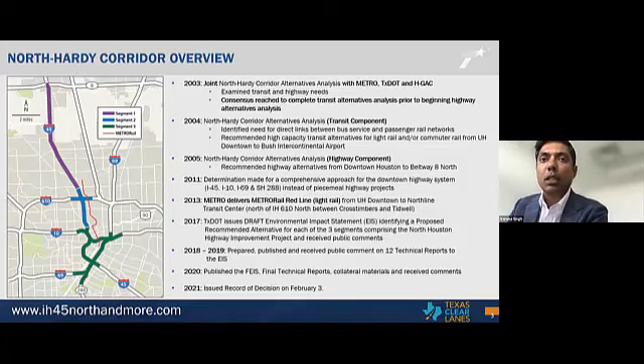So we published the draft environmental impact statement in 2017, conducted the public hearing and received comments. And then in 2018 and 19, we published the 12 technical reports that go with the EIS for public comments. And then in 2020, we published the final EIS with the accompanying final technical reports for public comment. And then earlier this year, we were able to issue the record of decision to conclude the environmental clearance process in early February.

So why is TXDOT proposing the North Houston Highway Improvement Project, or NHHIP?

We know that the corridor has high levels of existing congestion. Many of you may know that Texas A&M Transportation Institute publishes annually the top 100 most congested roadway segments across the state, and this particular corridor project has 5 in the top 10 across the state. So clearly it is congested.

We know the region also will grow by some estimates from a current 6 million to around 10 million by 2040, with anticipated projected traffic growth. There are certain elements that are outdated in their design in terms of curvature, of direct connector ramps, and low bridge clearances. Long stretches of the corridor also lack inside and outside shoulders, and it's an older corridor. We haven't done a major investment, capital improvement in over 30 years.

So the purpose of the project would be to apply current design standards to enhance safety, mitigate congestion by improving mobility and operational efficiency. A big part of the project would be to expand transit and carpool capacity with a 2-way 24/7 operation, specifically along I-45 in segments 1 and 2 as they terminate into downtown.

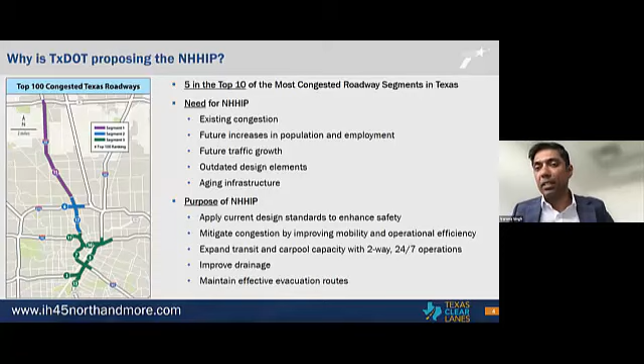And certainly maintain 45 as an effective evacuation route. I want to touch briefly on project development in terms of funding.

So you can see the segments there, and it's kind of reverse order of what's funded and our plan of attack of project delivery. If we had thought about it when we numbered the segments back in the day, in terms of when we would secure funding and come up with a game plan, perhaps we would have numbered it differently. So we're going to go in reverse order. We're looking to deliver segment 3 first, then move north to segment 2, and then finish out with segment 1.

And you can see, combining segments 2 and 3, we've got over 76% of the construction dollars secured, so $5 billion of funding committed. And then segment 1 is currently unfunded, representing about 24% of roughly $6.7 billion construction costs. So we're well on our way to securing the funding to deliver the corridor, which is kind of a pleasant situation to be in, to be frank, on a major initiative like this, to get the funding secured in this manner relative to the conclusion of the environmental clearance process.

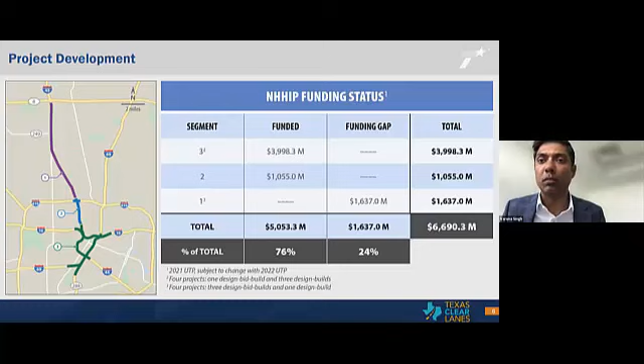Obviously, as much as we'd like to expedite construction, the bandwidth of the construction industry to absorb $6.7 billion in construction all at once is limited. So our plan to deliver the corridor is shown there with 4 distinct projects in segment 3, a single project in segment 2, and perhaps 4 projects in segment 1, as shown on the map and the table. But perhaps we can combine large portions of project 1A with segment 2 from a constructability standpoint. So that's still being evaluated.

We're going to use both delivery methods available to us: our traditional design bid build, or low bid letting, as well as design build alternative delivery, which is under Grady's umbrella. The first project is along 69, 3A. That's hard bid, design bid build traditional. And right next to it is the first design build, 3B.

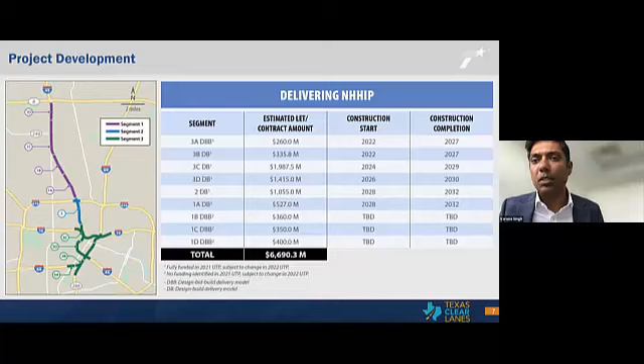So we're looking to push those out to construction in fiscal year 2022, and you can see the completion years. The idea would be then every 2 years after that, we push out the next component. So 3C would follow 2 years later with the design build procurement, and then 3D after that. And as funding comes online, we'll look to schedule portions of segment 1.

If you follow transportation news in particular, 45 or NHHIP has been a high profile project. There is certainly a vocal group of critics of the project, and in listening to those throughout the environmental clearance process and engaging stakeholders, we've come up with a number of mitigations that are part of the approved environmental clearance documents, the final environmental impact statement, as well as the record of decision, or ROD. I want to go over at a high level some of the significant mitigation we are proposing for the project.

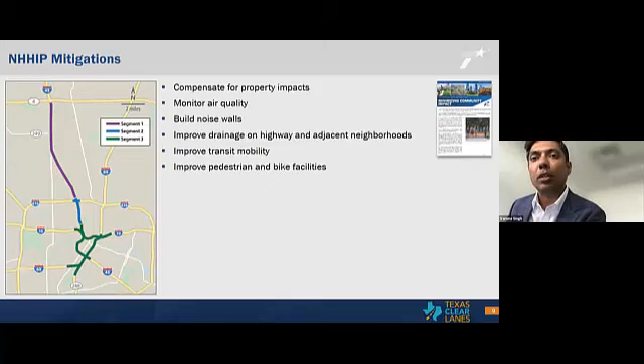Regarding the property impacts we are having, we have latitude to make a fair market value offer on the property, but we've committed to go above and beyond fair market value to assess it as if the impacted homeowner would like to remain in the neighborhood. Instead of diluting the comparables by looking at a wider geographic area, the comparables are intentionally selected from the neighborhood where the impacted homeowner or tenant currently resides. That will, by its nature, drive a higher value of compensation so the homeowner or renter, if they so choose, can remain in their current neighborhood. Federal law doesn't require them to choose that, but while we can compensate them for that higher amount to remain local, it's ultimately their choice.

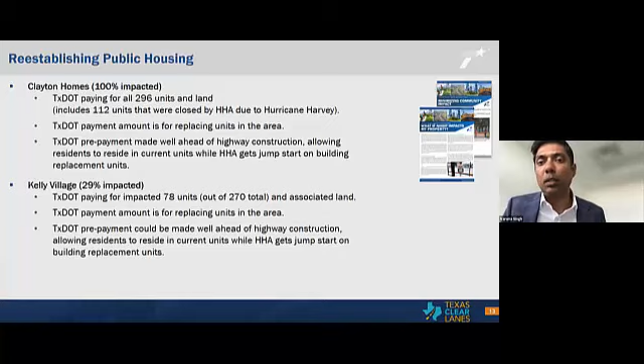Kelly Village, it's a 29% impact that the project is having, and we are committed to structuring the acquisition in the same manner, where we're depositing the dollars well ahead of construction, so HHA has the financial resources to rebuild the units before we need the property for construction. Those negotiations are ongoing.

Air quality. This is on major highway projects, obviously in metropolitan areas, a concern. The data here shows that by and large, air quality is improving in the Houston region. This is shown with metrics that for a region in non-attainment, the metrics monitored by EPA and TCEQ are actually improving compared to increase in population and daily vehicle miles traveled.

So you can see as the population has increased in Houston from 2000 to 2017, and miles traveled have also increased, you can see the CO, NO2, fine particulate matter, and ozone have actually gone in the opposite direction, in a good way. So with that, TXDOT is still committed to providing dust suppression during construction.

We are committed to funding and deploying ambient air monitoring for a minimum of 5 years during construction for the segments. The results of the monitoring would be on a publicly accessible website. The first monitoring, I believe, is next to an elementary school adjacent to the corridor, to show that the project itself is not impacting air quality at that site.

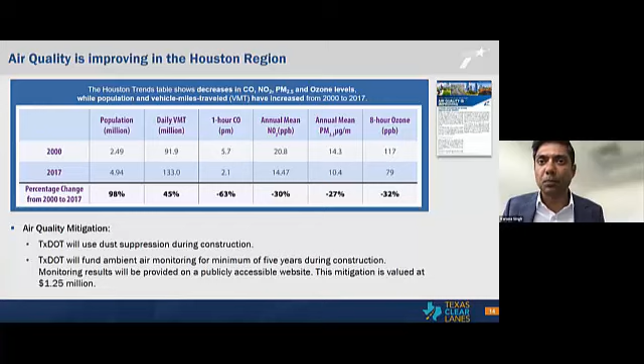Noise impacts. I'll say the corridor is so old that we didn't have the noise mitigation requirements in place when the original corridor was constructed. So right off the bat, with the implementation of this project, those requirements would get implemented.

So certainly the noise analysis shows that certain noise walls were warranted in certain locations. But in addition to the warranted noise walls, TXDOT is providing adjacent property owners in environmental justice areas, which are high minority, low income areas, the opportunity to receive noise mitigation that did not otherwise qualify under the noise analysis criteria. And so we're calling these aesthetic walls.

I don't miss an opportunity to remind our folks we probably should have come up with a better name, because aesthetic walls give the impression that it's going to be better looking than the noise walls. They're essentially noise walls, and the same treatments will be offered for input from the adjacent property owner as noise walls, to offset adverse impacts in high minority and low income areas. They also provide a visual screen.

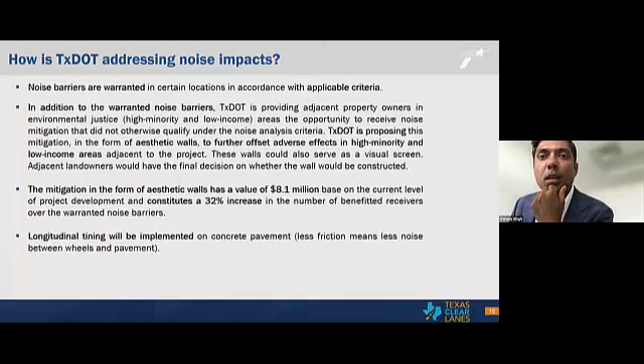Flooding, we will be applying the new Atlas 14 rainfall criteria. The main lanes and managed lanes will be designed to remain passable in the 500-year storm events. Pump stations will pump stormwater into detention basins, and detention basins will be sized to hold stormwater until it can be safely released into the receiving bayous.

You can see the map there, the reality of where the project sits intersecting and paralleling the major bayous in the region. Working from south to north, you've got Brays down below, Buffalo Bayou, and White Oak, and then we cross Greens up north in segment 1.

In addition to the highway-specific improvements for drainage, after Hurricane Harvey, the city of Houston and flood control applied for FEMA grants for 2 bypass canals in the Central Business District along Buffalo Bayou, where the cursor is. And so TXDOT is actually an engineering and financial partner with the city and Harris County Flood Control, because as we all know, a drop of water really doesn't care about jurisdiction.

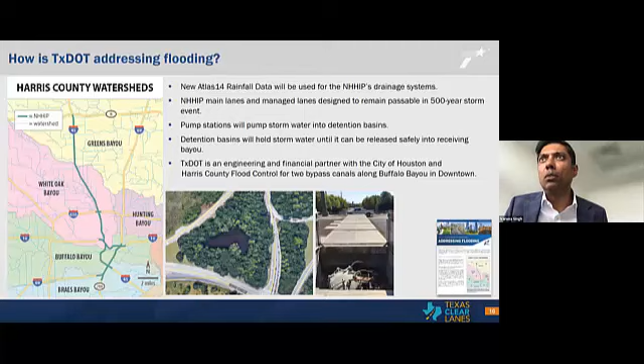It's going to flow where it's easiest to flow. And so we recognize the value of leveraging the improvements by other entities beyond the state's right-of-way and our core responsibility for drainage with the highway. That's why we're contributing financially to their FEMA application for those 2 bypass canals, because there's an overall regional benefit to get those canals constructed.

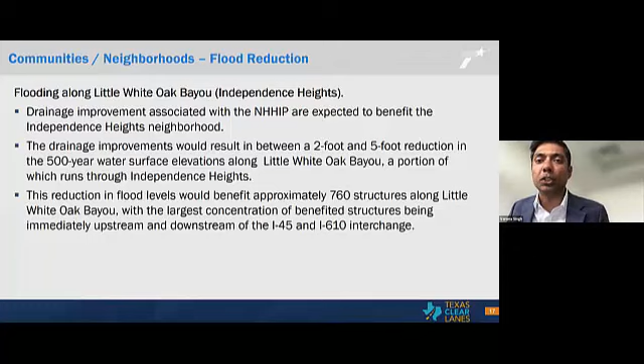Specifically, Little White Oak Bayou, which is the northern part of segment 2 and the southern part of segment 1, is in the 610 area, near 610 and I-45, where the purple segment meets the blue segment. The project area includes Independence Heights on the west side of 45. Large portions are in the floodplain today, and these improvements, combined with TXDOT and the canals mentioned earlier, would bring dramatic improvements to this area with a 2 to 5 foot reduction in the 500-year floodplain water surface elevation along Little White Oak, resulting in approximately 760 structures being pulled out of the floodplain, in the 45-610 interchange northwest quadrant.

A lot of critics of the project want more transit. What we offer is that the project itself, before its conception, did take transit into consideration when we jointly studied the corridor with Metro and the MPO, starting back all the way to 2003.

The project is the highway component. We're talking about Interstate 45, mainly a designated hurricane evacuation route. So TXDOT has a certain responsibility to keep 45 viable as an interstate facility for drivers and freight. The Port of Houston is one of the largest ports in the nation, so truck freight movement is critical to the regional economy as well as the statewide and national economy.

But we did consider and incorporate transit every step along the way. As mentioned earlier, Metro delivered the transit component with the red line extension shown on the map in red. The vast majority of the added capacity of the highway component is in the form of non-toll managed lanes, which greatly expand Metro's bus service and carpool vehicles.

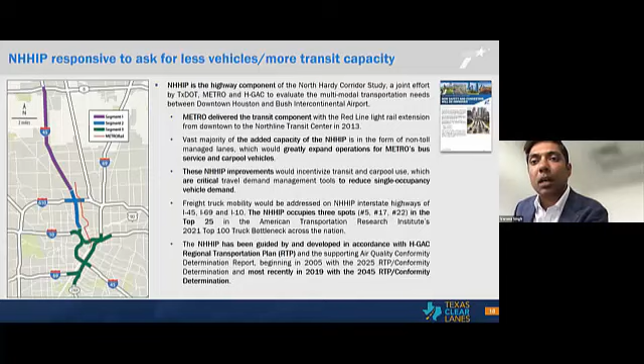These improvements would incentivize transit and carpool use, which are critical travel demand management tools to reduce single occupancy vehicle use. TXDOT does not have a policy directive to cause congestion to force folks into a mode choice away from single occupancy vehicles toward carpooling or transit. What we do have policy direction for, and what we think is the appropriate way to manage congestion and move the needle on driver behavior, is to provide options that over time cause that change in behavior.

So expanding the current reversible HOV transit lane in the middle of 45 today to a reliable 2 lanes in each direction with adequate shoulders, we think is how you do that in a responsible way.

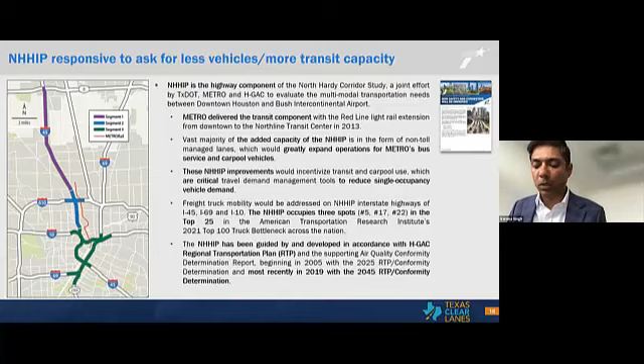Certainly with the Port of Houston, freight truck mobility is a critical need for the corridor. The American Transportation Research Institute's 2021 top 100 truck bottlenecks across the nation list has 3 spots for 45, with the top one ranking in the top 25 nationally. Certainly 45 has been developed in accordance with the region's long-range regional transportation plan.

The project also significantly improves pedestrian and bike facilities and safety components. Out of coordination with the city, we developed the pedestrian realm concept, which would increase the space behind a protective curb for both pedestrians and bicyclists. The project also reconnects several streets behind the convention center, one of which will be a dedicated bike-pedestrian connection between east of downtown and the central business district.

The project also reconnects Andrews Street with a pedestrian-and-bike-only bridge on the west side of downtown. We're pretty excited about this reconnection because it would reconnect Freedmen's Town, a historic African-American neighborhood spanning the central business district inside 45, with the larger Fourth Ward area outside the central business district to the west.

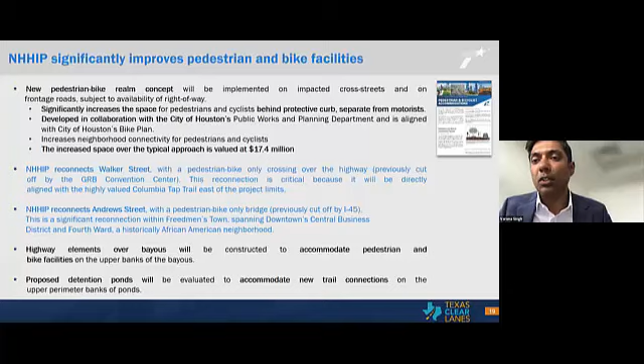We will design and construct the highway elements over the bayous to accommodate pedestrian and bike facilities on the upper banks of the bayous. TXDOT has, in fact, delivered a number of those projects for the city and other stakeholders, who have built out a pretty extensive trail system along the bayous that exists today. Any new ponds we construct will be evaluated to accommodate new trail connections on the upper perimeter of the ponds.

This is a visual of the pedestrian-bike realm concept. You've got your typical approach on the left with a cross street with a bike lane. Typically, we put the bike lane in with the travel lane, the outside vehicle travel lane.

With the realm concept, we're looking to move the bike lane behind the protective curb, in addition to having a 5-foot buffer. That nearly doubles the space from what we typically do with a 6-foot sidewalk and 3-foot bike lane—9 feet—to about 17 feet with the sidewalk, then the bike lane, then the buffer.

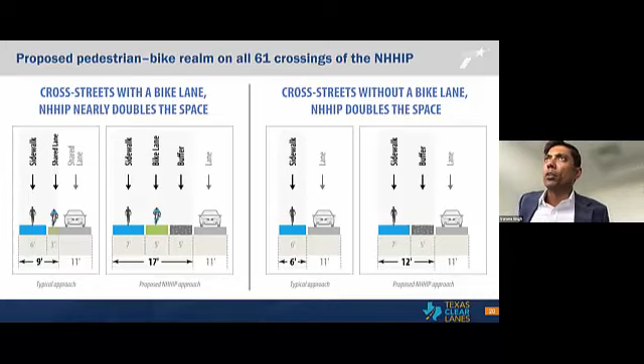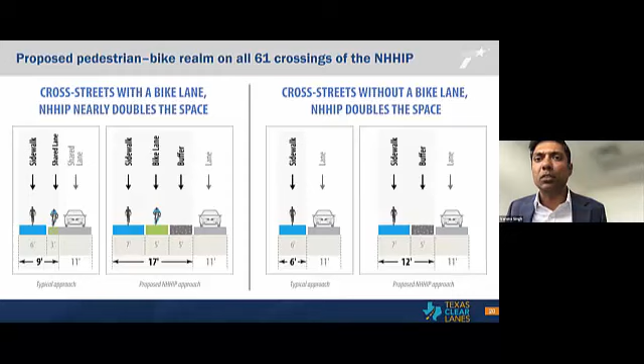If a cross street, the city does not want a bike lane on that particular cross street as it crosses the state's right-of-way, either over or under the freeway, typically we would build a 6-foot sidewalk on each side. What the project is committing to is a 7-foot sidewalk with that 5-foot buffer behind the protective curb.

That's a significant improvement on bike and pedestrian facility and movements, and will certainly enhance safety of those users. So we're committed to applying this concept on the 61 cross streets that either go over or under the highways of this project. Every project has its terminus—beginning and end—but it also has its width, in this case the state's right-of-way width. So we're looking to do what we can within the boundaries of our project, and you can see the improvements that would bring.

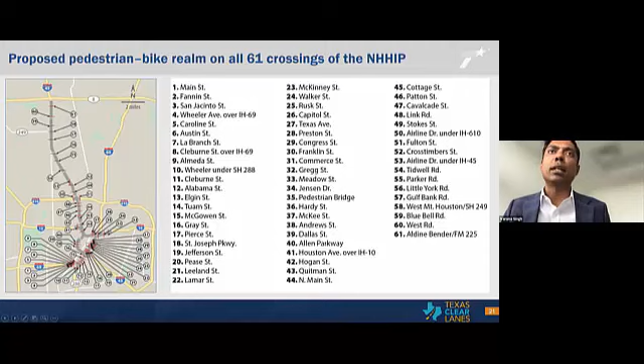So key takeaways: the NHHIP is a highway component of the original joint effort by TXDOT, Metro, and HGAC to study the needs and propose improvements to the area between downtown and Bush Intercontinental Airport. The NHHIP has 9 of the top 20 most congested roadway segments in Texas. The project strategically adds capacity to incentivize multimodal choices via high occupancy vehicle use, bus transit mode, as well as future-proofing the corridor for vehicle innovations.

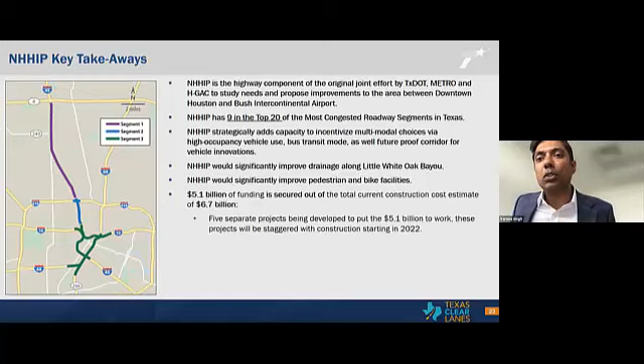The environmental clearance documents describe the management facility along 45 as being able to adjust as needed to any new technologies that may come on board with connected or automated vehicles. We are proposing significant drainage improvements along Little White Oak Bayou. We just touched on the significant improvements for the pedestrian and bike facilities. $5.1 billion is currently secured out of the total $6.7 billion of construction costs.

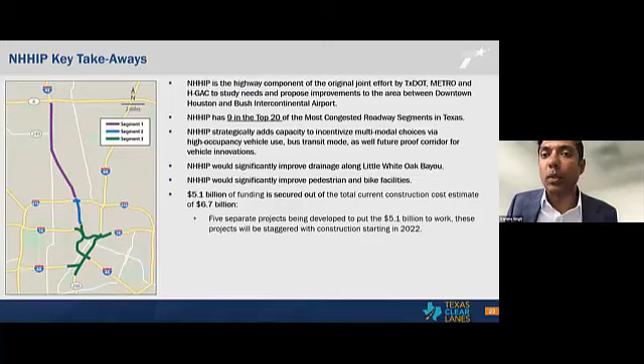We're looking to put that $5.1 billion to work as soon as possible with 5 projects staggered, with the first couple starting out in 2022. And I will end it with some key staff resources that are knowledgeable about the project, and certainly any other interest there is with our wider work in the Houston district.

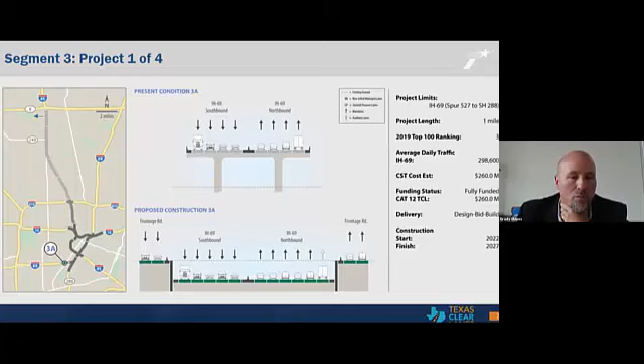Moving to the next segment 3 project that will be delivered, is 3A, is what we're calling it. This one will be delivered as a design bid build project.

It involves the 69-288 interchange, and you can see, I'll point my cursor here, but it goes to almost the I-45 South interchange. So we're only encompassing the 69-288 interchange. We're stopping just short of the 45 and 69 interchange there with this particular project.

What you'll notice here in this map is 3A and 3B are directly adjacent to each other and will have some overlapping construction. Anytime you have adjacent construction projects, you end up having to coordinate and communicate across those project boundaries to ensure that the construction happens, that it makes sense from a traffic flow perspective.

Each contract is independent, so from an interface standpoint, you have two issues here. One is the contract delivery mechanism. The 3A project will be a design bid build, where there are certain conditions where TXDOT has a certain amount of risk, versus a design build where there is some risk transfer.

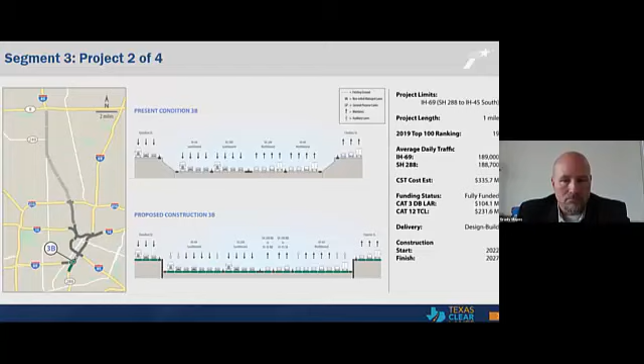These are the first two projects that we're progressing to get out the door and get to construction. Those are both still ongoing, but they're well on their way at this point.

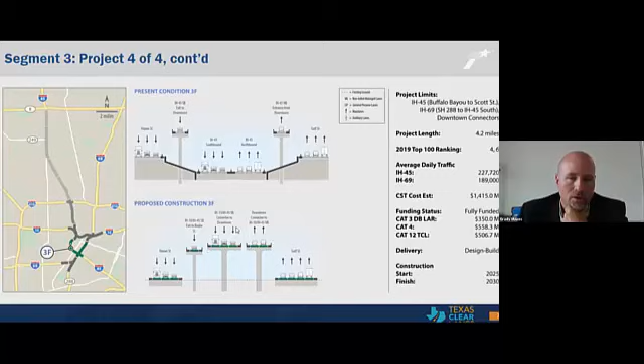Advance here. So you can see on the west side what the existing configuration is, and then where we're showing the downtown connectors, and then you've got local streets that would remain.

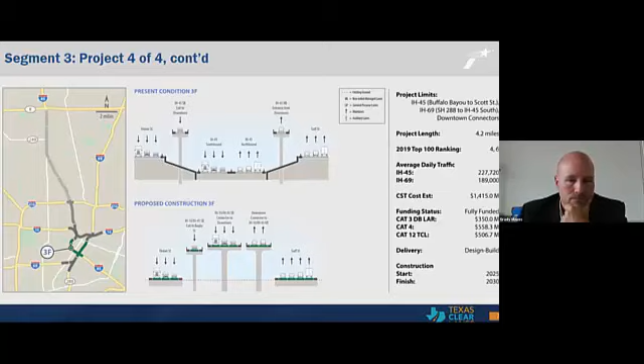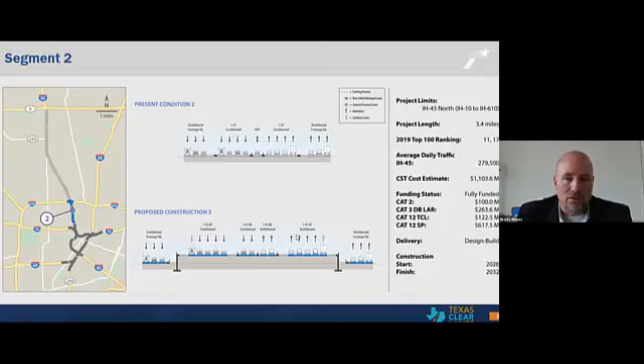You can see construction here at 2026, but we're looking at a complete reconstruction, where you've got general purpose lanes, managed lanes in the middle, where the existing condition has a reversible 1-lane HOV. That will be expanded here, as you can see in a typical section.

One of the things that we've done in coordination with some of our local partners, we have established some working groups. One of the working groups that I'm on is called the Traffic Steering Committee. It's a collaboration between TXDOT, Metro, City of Houston, the Downtown District, HGAC, and representatives from each of those entities come together and talk through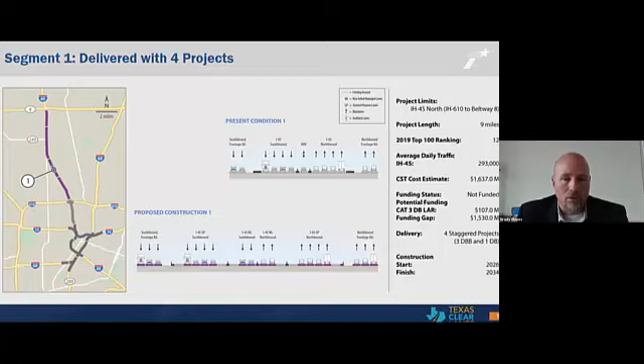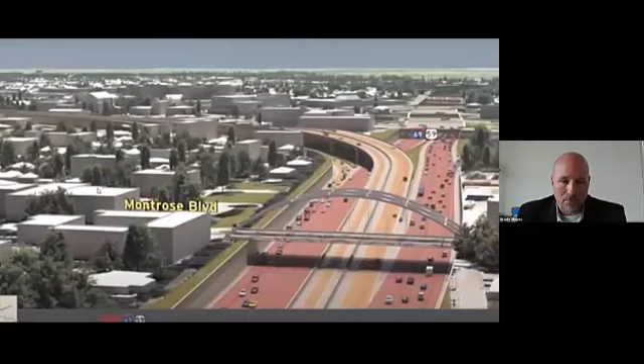So the last slide I have here, and we're going to see if this works. Okay, so this is a rendering. This is coming in on 3A. This is I-69. This here going to the left is Spur 527. You can see where we depress it here.

TXDOT is going to build these caps above. This is green space that is potential if there are partners with TXDOT that will fund some of those. That is not something that will be constructed as part of the project here, but this is coming into the 3A, 3B interchange where this interface happens.

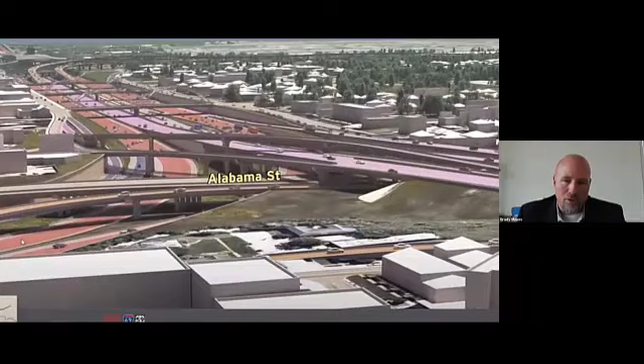As we turn here, you're now looking at the 69-288 interchange, which is part of NHHIP Segment 3B construction. These arch bridges are city cross streets that will be reconstructed. The arch bridges are somewhat complex. They are intended to match the existing arch bridges that are just south on I-69.

This we're coming into is the I-69, I-45 interchange, which is a part of the 3C project. This big building you're seeing in the middle of the screen is the George R. Brown Convention Center, and the area that's fenced off there is that operations area that I was talking about.

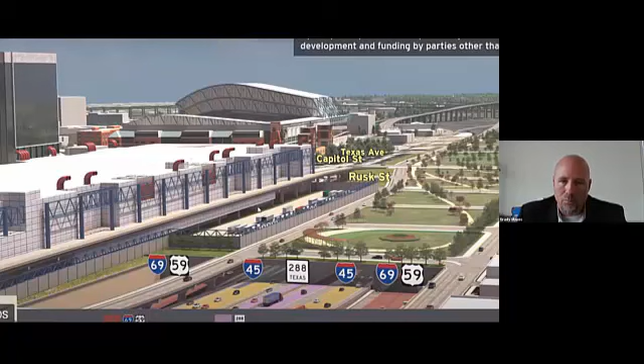You'll see that I-45 and I-69 depress here. You can see the cap that we construct. There are ongoing discussions with potential partners about creating a green space here, but that is something that would be funded by others. And I will click play.

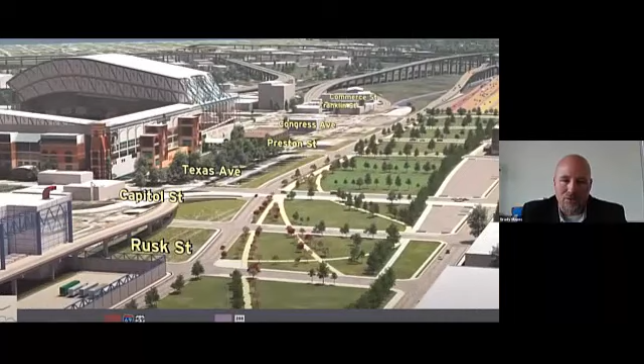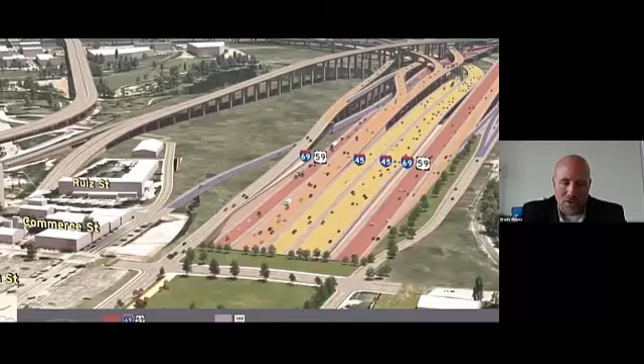The other large building here behind George R. Brown is Minute Maid Park, that's where the Astros play. So one of the other considerations that we are looking at as a traffic steering committee is major events at facilities like that are adjacent to the project.

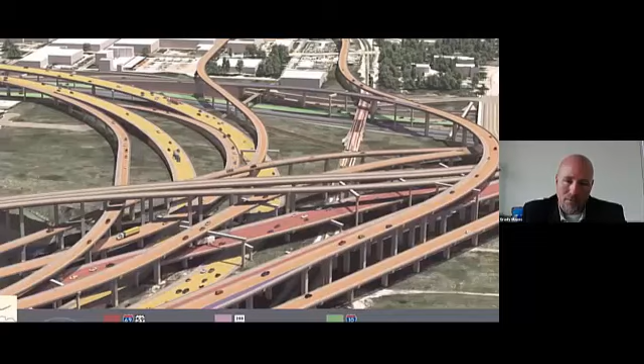This is coming into the I-45, I-69 interchange, which would be part of the 3C project, the design-build project. You can see the number of structures and the weaving that has to happen to make all of these structures work.

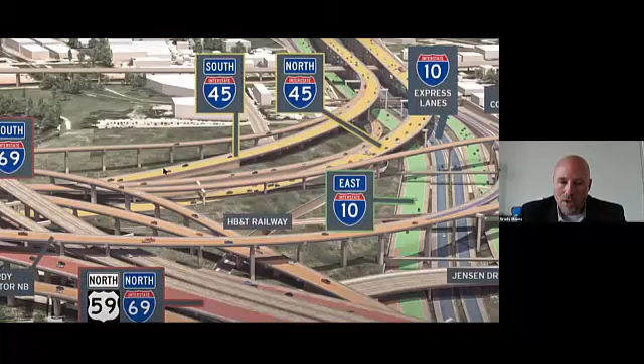I like to think of these as one large puzzle, and how do you move the pieces to create the ultimate configuration while still keeping the existing in place. You can see here we have one railway crossing that comes right through the middle of this interchange, which creates its own complexities. We are turning west here on I-10.

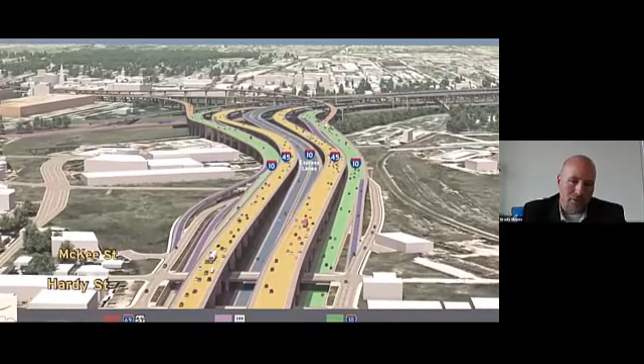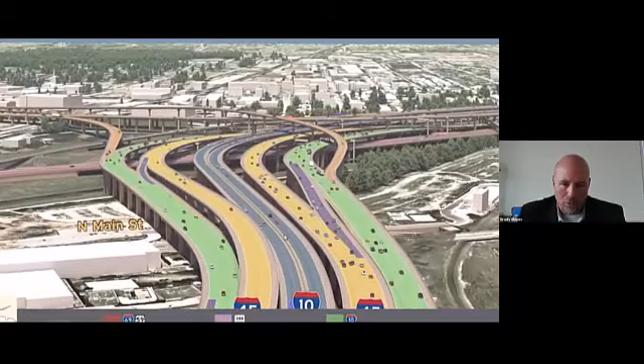This is the I-10 and I-45 lanes on the north side of downtown. This would be part of the 3C project as well, part of that 7-mile project that encompasses three interstates, the I-10, I-45, and I-69. The blue lanes here are the express lanes that are just a direct pass-through.

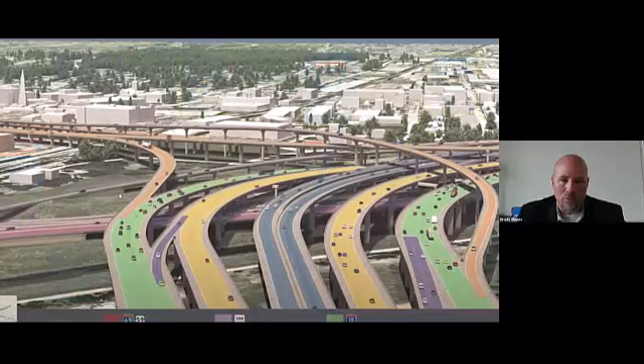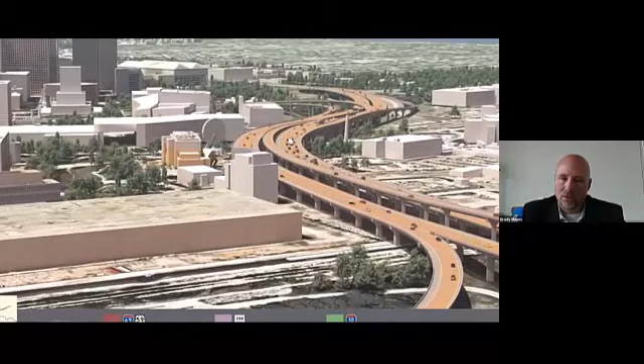You'll see the interstate is separated. This goes into the downtown connectors, which dump you on the west side of Houston to keep that existing access. That is where what's called now the Pierce Elevated, I-45 routes today on the west side of downtown. This will be reconstructed, and the downtown connectors will keep that existing access where it is today, but it will not continue around in that same footprint that I-45 is today on the west side.

So Walker and McKinney, there's on this side, City Hall is over in this area. There's some playhouses, I guess. There's some very large access that comes in off this way. And so you can see where you've got these cross streets that come across us.

Andrew Street, that's the street that we will reconnect that Varuna mentioned in his portion of the presentation. That recreates that connection that was severed originally by I-45. And so that gives you an idea of what that looks like. It's a large scope.

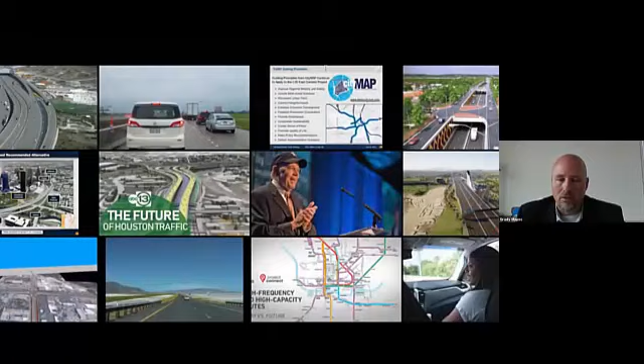This is the website for I-45 for NHHIP. It's I-45 North and more. All of the information is here. There's obviously the record of decision, you've got project information here that is available for review. So it's kind of a one-stop shop for information related to NHHIP if you desire to go read up on additional information here.

Hey Jonathan, I have a few questions if you don't mind. Yeah, go for it. Hey guys, Varuna and Grady, great presentation. Seems like a very simple project, isn't it? Not complicated at all. So I have a few questions.

Varuna, has the compensation discussion, which is always sensitive, been taken on already with home and business owners, and how has that been received? From our perspective, we've started acquiring right of way, and actually started before we got the ROD, what's called early acquisition, and it's really at TXDOT's risk. From our interaction with Houston Housing Authority for Clayton Homes, they see it as a positive. The property owners we've engaged with, homeowners and tenants, has largely been positive, so we're working through those acquisitions.